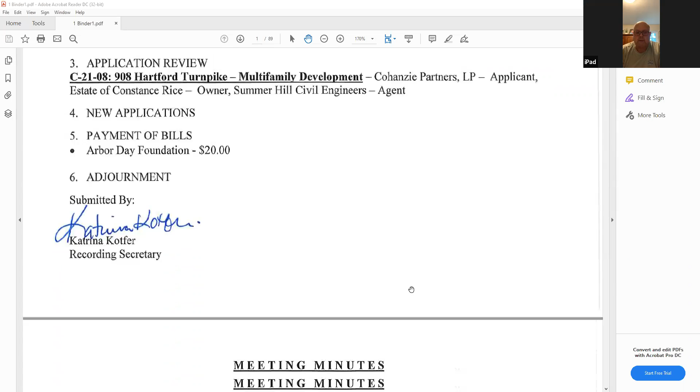Moving on to item number 2, approval of the August 12th, 2021 meeting minutes. I make a motion to approve the August 12th meeting minutes. We have a motion. Do we have a second? Do we have a second on the meeting minutes? I second. Julie, please. Seconded by Julie. We have a motion and a second. All those in favor signify by saying aye. Aye. Aye. Opposed? Motion carries.

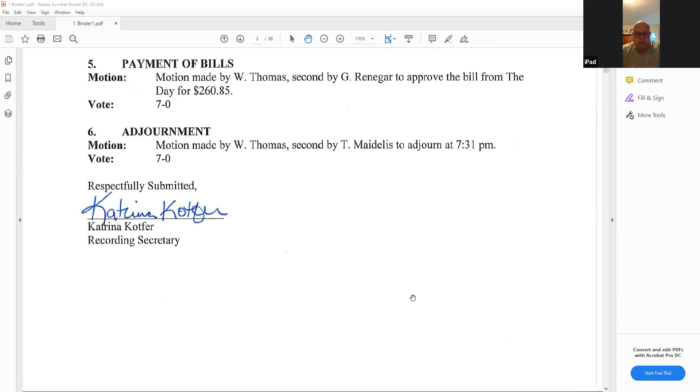Item number 3, application review, C-21-08, 908 Hartford Turnpike, multifamily development, Cohanzie Partners LP, applicant, Estate of Constance Rice, owner, and Summer Hill Civil Engineers is the agent. I'd like to turn the meeting over to Mike. Thank you, Mr. Chairman. For the record, my name is Mike Ott. I'm a licensed professional engineer and land surveyor with Summer Hill Civil Engineers and Land Surveyors in Madison, Connecticut. With me tonight is Sagan Simcoe, our wetland scientist and soil scientist from BL Companies, and Harold Foley and Quandra Swayze, both from the development team.

So I think you've heard an explanation of the project a couple of times at the last 2 meetings. Mr. Chairman, Maureen, I would just say that we believe we have addressed Maureen's staff review comments. We submitted a written response and hopefully you've all seen that. In addition, one other thing that was suggested, I believe, by the current chairman in the last meeting, was to add a hydrodynamic separator structure in line in the stormwater management system prior to discharge to the infiltration basin.

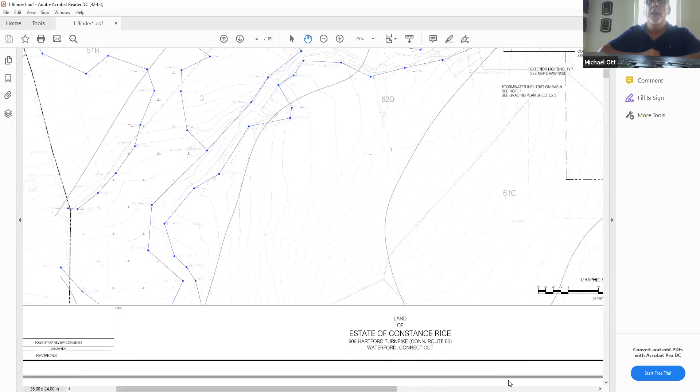Katrina, if it's possible, could you switch to the next sheet or scroll down to the next sheet? And if you could zoom in below the right-hand building, yeah, that's great. So I believe the biggest comment was we were asked if we could move the outlet of the stormwater management system from where we had it, where stormwater would discharge right at the watercourse boundary on the right-hand side where Katrina is showing her cursor.

If we could move it over to the opposite side, right up against the community building, so that the discharge and the activity required to construct the outlet would be 50 feet or greater from the inland wetland boundary. We were able to do that. The red line represents a 50-foot offset from the watercourse and wetland boundary. You should be able to see the stormwater outlet just to the right of the community building. And yep, Katrina's got her cursor right on it. So we were able to relocate that outlet.

And then, as I said, we were also able to add a hydrodynamic separator, that little circle, yep, right there. That's great. We were able to add that also, and the elevations worked out. I was concerned because we have 4 different pipes that cross each other, and I had to make sure that they would cross each other without any interference, and they do work. Don't worry about it. Make it work in the field, you know? There you go. Right?

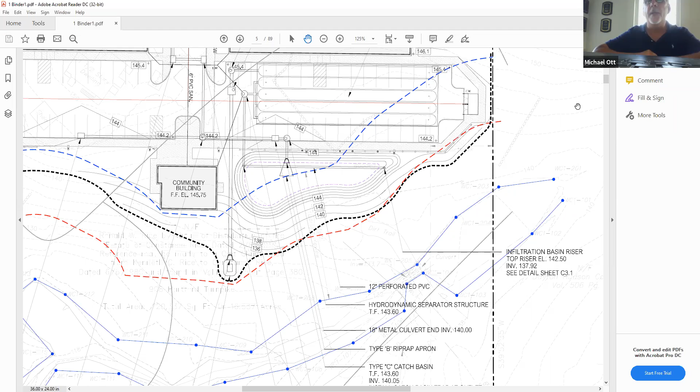All right. Is that something you think we put on the trees in the area, or is it probably pretty wooded, right? It's going to be wooded, I would think. It is. What I found is it's kind of best to try to do it in the field. Sometimes it'll work perfect where it could go on a tree. Sometimes you've got to set a wood post. Yeah, if you got to do a 4x4 post or something. Yeah. We just did this in the town of Guilford, some 120 or so markers. So in that recent experience, I found that it's probably best to try to make that decision in the field. And we could do that with Maureen and make sure she's in agreement. All right. Thank you. Great. Any other questions from the commission?

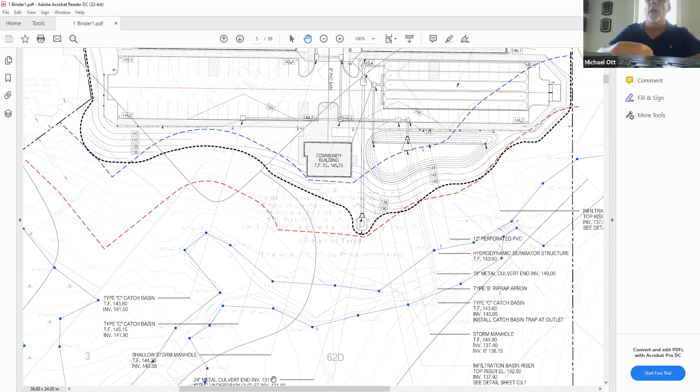Ivy Bliss here. I'd like to know, how does this hydrodynamic separator work? So it's a manufactured, it's basically a standard precast concrete manhole, but inside it, the manufacturer has components that provide a swirl technology. I'm sure you've heard this term before, where the stormwater is directed around to create a swirling motion. And there's certain baffles and filters within the structure that force floatables and larger debris to go into the sump, and larger sediment to go into the sump, so that they won't leave the structure and be discharged, as well as there's components that trap hydrocarbons floating in the stormwater, and trap those in the structure. And then that structure is maintained periodically, and that sediment and material are removed and properly disposed of.

Okay, thank you. It's Julie here again. That maintenance was part of your proposed maintenance plan, the overall plan? You know, as soon as you started to ask that question, I realized that I forgot to add the maintenance because we added the hydrodynamic separator. I gave Maureen a revised operation and maintenance plan and completely forgot to mention it, but I will add that. Thank you. Any other questions from commission members?

Hearing none. Maureen, do you feel all the comments have been addressed satisfactorily? Yeah, thank you, Mr. Chair. The revisions had just come in on Tuesday, and I've been working back and forth with Mike on getting that finalized. I'm sorry it wasn't in your packet because I just finished it today.

But I put together some findings and considerations for the commission's decision on the finding that really they've responded to all the staff comments, the commission requests and comments. So this is in the file. Even Mike doesn't have it yet. Sorry, it's just hot off the press. But in terms of going forward, if that's what the commission wishes to do, I thought it would be important to have the findings and considerations documented in the file.

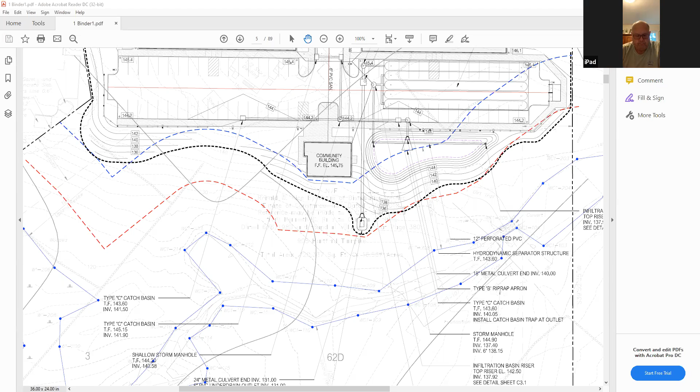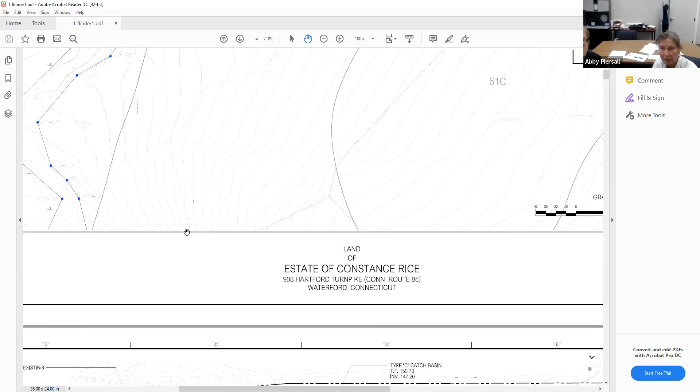All right, moving on to item number 4, new applications. Do we have any new ones? We have not received any new applications and I'm not aware of any pending right now. All right. Item number 5, payment of bills. We have one for the Arbor Day Foundation in the amount of $20. Yeah, the commission has been a long-term annual supporter of the Arbor Day Foundation. It's in our budget for agent support and memberships. All right, would anyone like to make a motion to pay this?

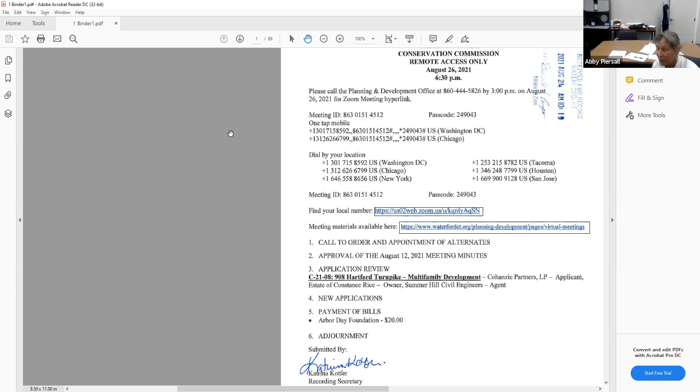First, I have a question. That seems like such a minimal contribution from a large organization such as a town. Just curious, what is the $20, and is it worth considering, too late for this year's budget, stepping that up a bit? It seems to me like an individual contribution. It's their standard minimum contribution. We get 4 newsletters from them, and with that $20, they send you 5 trees. And I always say, keep the trees and plant them somewhere on one of your other places.

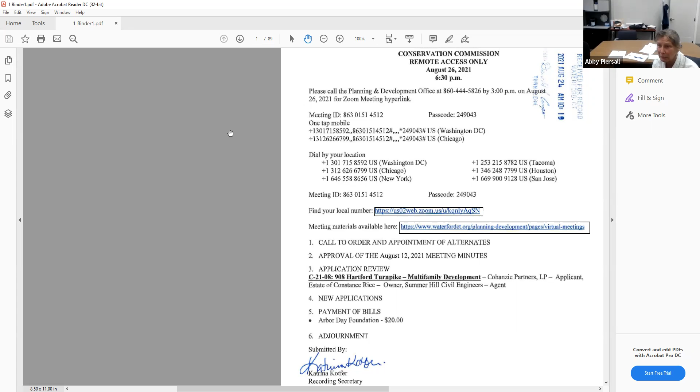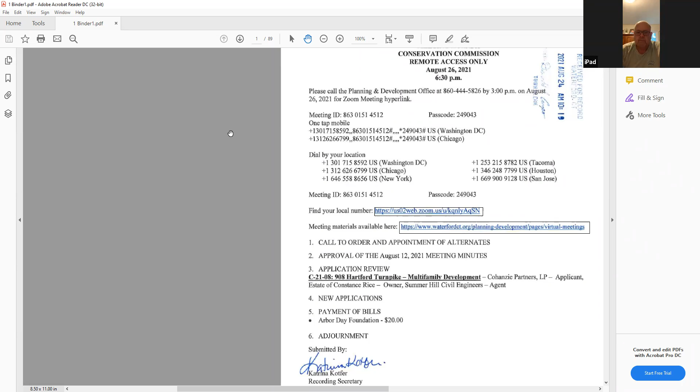They have a lot of good programs, and $20, I know it seems like a little bit, but they're a fairly large organization. They welcome it every time. They never ask for more. Well, thanks for explaining more. Thank you, Maureen. Okay, so, someone make a motion to pay the bill then, please? I make a motion to pay the Arbor Day Foundation bill of $20. Do I have a second? I second it. All those in favor, signify by saying aye. Aye. Opposed? Abstentions, motion carries. And then moving on to item number 6, adjournment.

Okay, anyone want to make a motion to adjourn? I make a motion to adjourn. Motion by Ivy, second, please. Do I have a second? I second. Second by Julie. All those in favor, signify by saying aye. Aye. Thank you all very much. Oh, hold on. Hold on a second, you guys. Let me just.